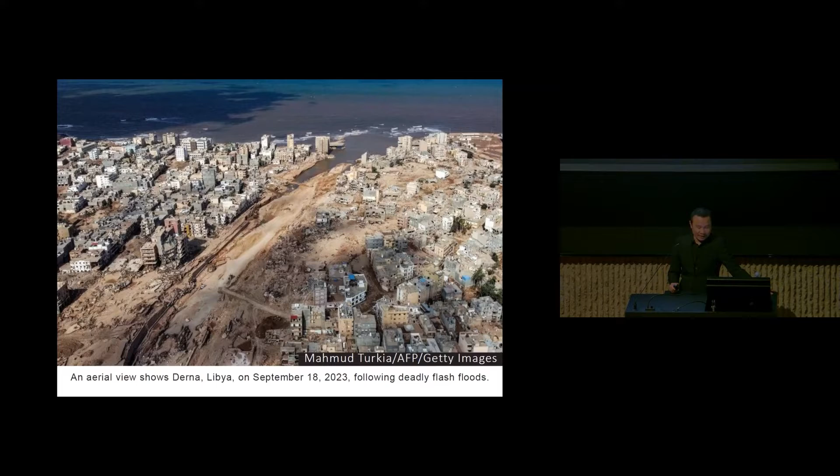But when I started to study architecture, I think I was familiar with the life without electricity, so I really want to do architecture that can have as low as possible energy consumption and electricity.

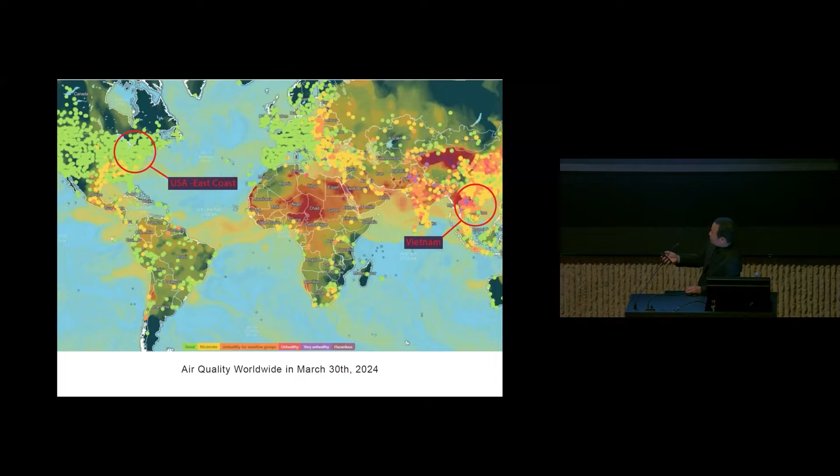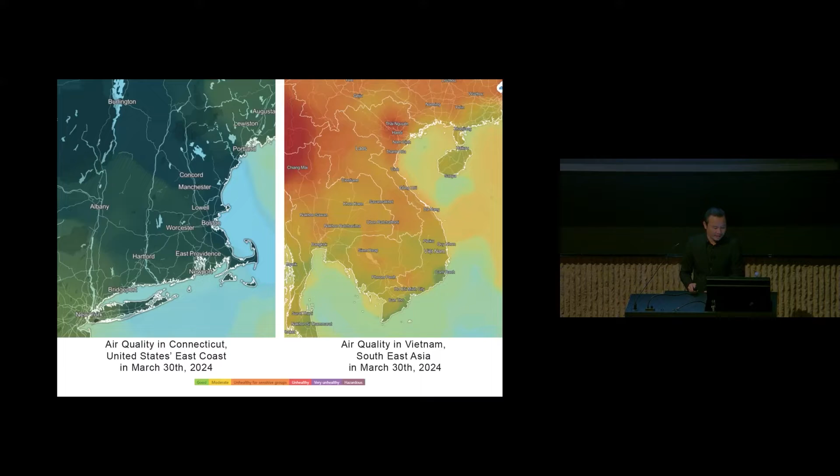And you can see here where we are, the air quality is really good with the USA East Coast, but the area of Vietnam is really polluted air, and Ho Chi Minh and Hanoi are both cities with strong pollution.

And the biggest problem is the city lacking greenery. Ho Chi Minh City has just about 0.7 square meters per person, while Hong Kong has even more, and Singapore, Kuala Lumpur, or Tokyo too. It makes the city look like a concrete jungle, with more than 10 million people living in this kind of city at the moment.

We lack greenery, we lack playgrounds, sport playgrounds. And after COVID, especially during and after COVID, a lot of people got depression and anxiety, because you can see if we live in this situation and we come back here, you live in a concrete box and go out and immediately hit heavy traffic jams. This situation plus COVID made people more nervous and more anxious and depressed.

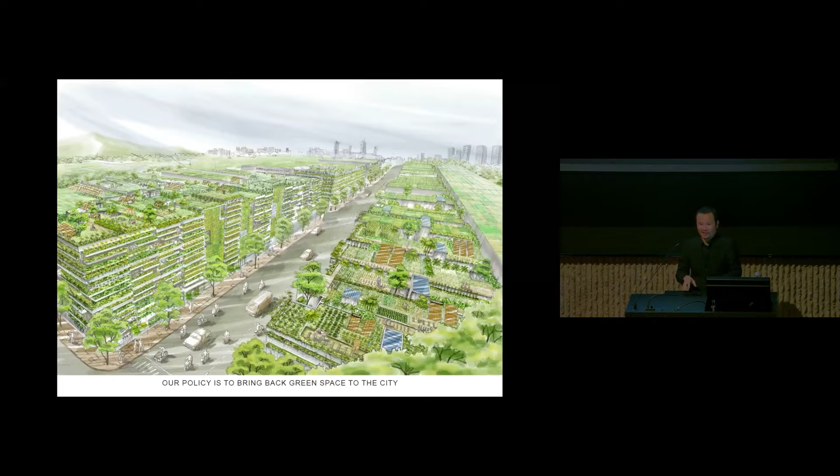So we try to do it one by one in the city, even very small houses, each one can be a pocket park, connecting people with nature. We contribute one small park for the city, connecting the dots.

After that, many other architects also joined that movement, and the city became greener and greener through architecture and master planning. So let me explain one by one.

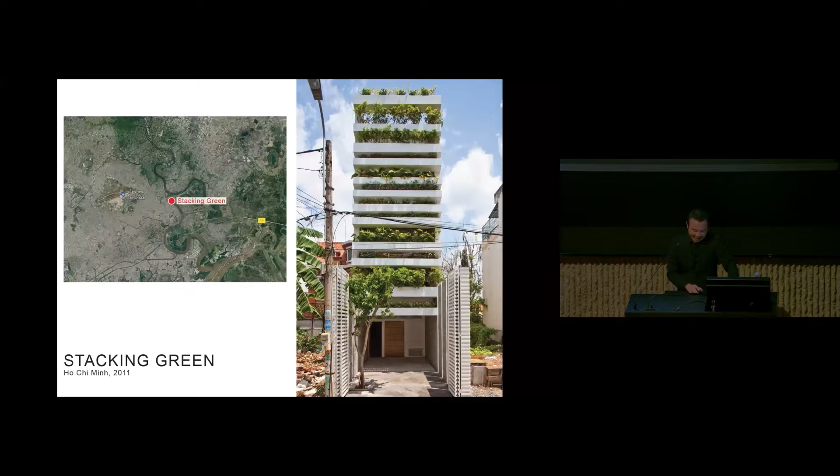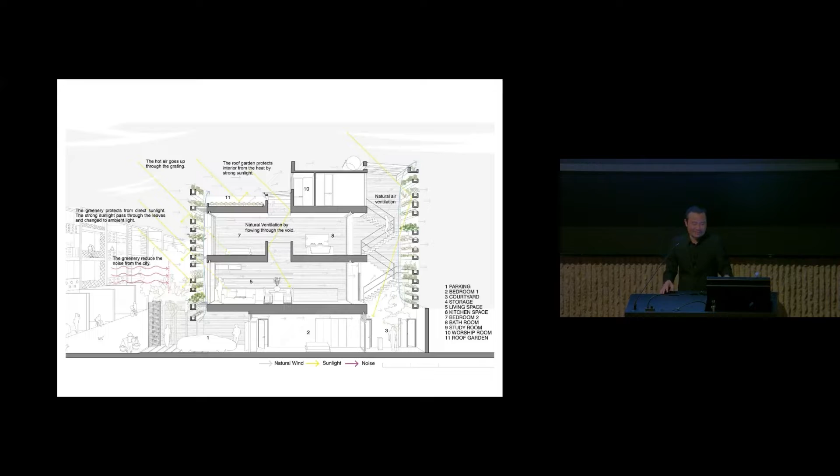In that situation, a very typical narrow house is just 4 meters wide and 20 meters deep. I designed this for a friend for free first, because I had just come back from Japan, and at that time it was very hard to convince other clients to do our kind of design work. So I thought we should start by doing a project for a friend for free, and then they would allow us to do whatever we wanted, within this 4 meters wide and 20 meters deep plot of land.

So we made a filter outside the house because it's quite polluted, and it also works to stop very strong sunlight, because in Ho Chi Minh City, like in Bangkok or Jakarta, we don't have winter, only hot summer all year round. So dealing with the wind, the sunlight, and greenery is really important.

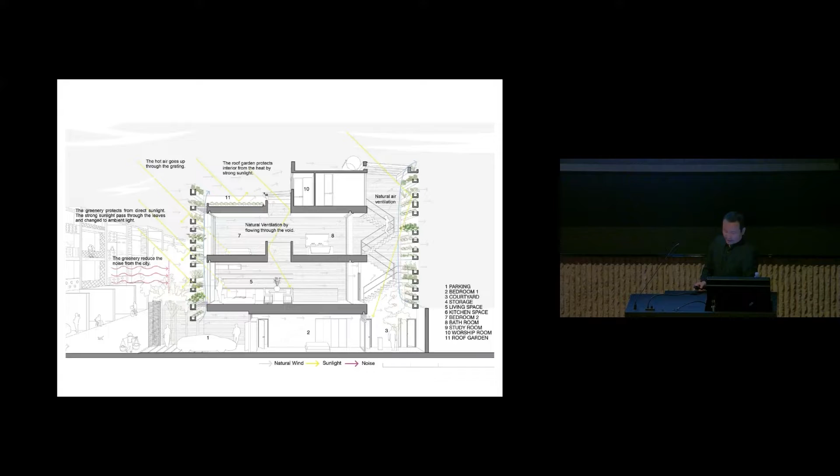So we make the filter outside the house to stop sunlight, but the wind can still go through in the middle of the greenery, and also we can create good shadow and ventilation for the house, because we have the courtyards here, and the ventilation goes through the void in the middle. Even though the house is very small and narrow, we still can create these courtyards.

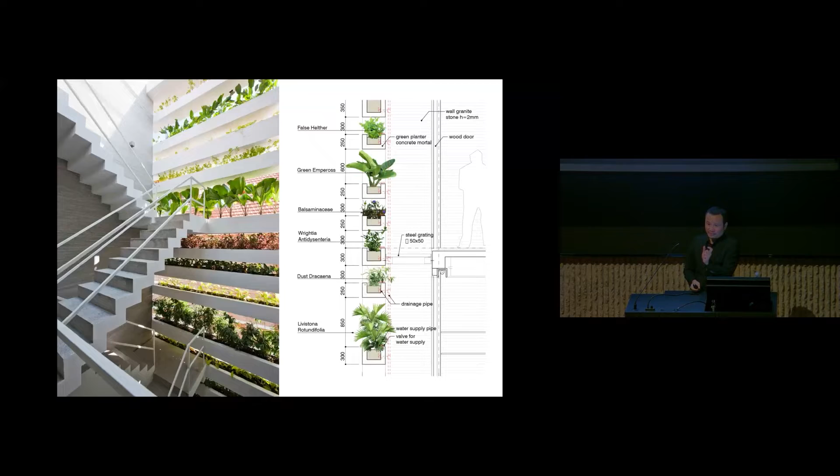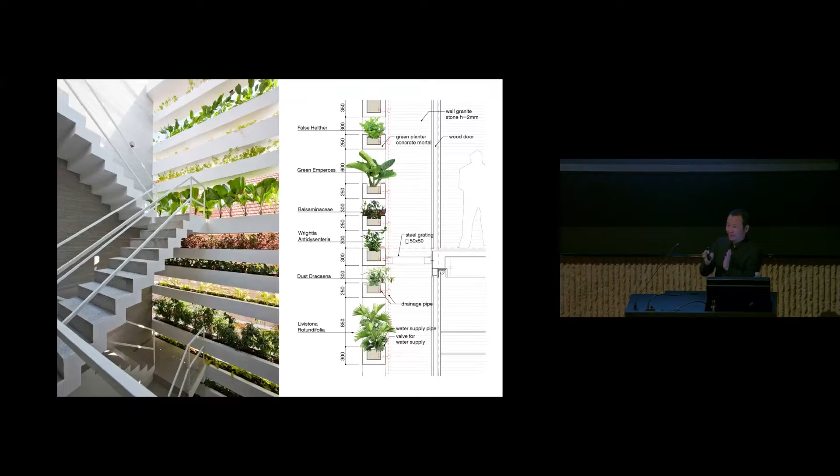And the courtyards at the end look like this. At that time, I was in Japan, trained there, and they do glass, air, and glass to make the double skin. But that is better for cold weather. For tropical climates, I thought we should do green, air, and glass instead — that's better for a tropical double skin.

So here is the back courtyard and the facade with a very simple system, and we still have the void in the living room for the hot air to go up from there. Even though the house is quite narrow — just double the width of a bed, actually less than double — we still have living spaces within the green space.

The next one is this school, where we won the competition. At the beginning, for the competition we submitted another proposal to win first, because people at that time thought building this would be difficult and expensive in Vietnam. After winning the competition, we showed this design to them, and that is what we wanted to build. They agreed, but said we should build it within about 2.5 million US dollars.

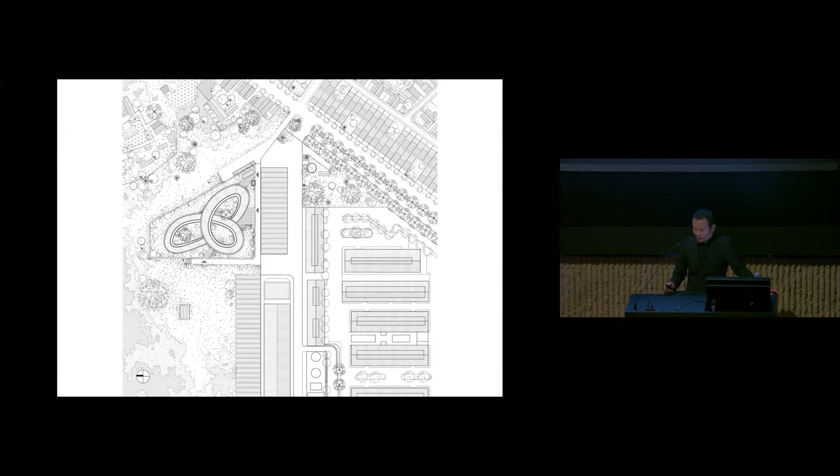This one is for a shoe factory, with about 23,000 workers working there, and their children learn in this school. You can see the situation of the city, which lacks greenery, so we wanted to provide a very safe roof for them to maximize their playground.

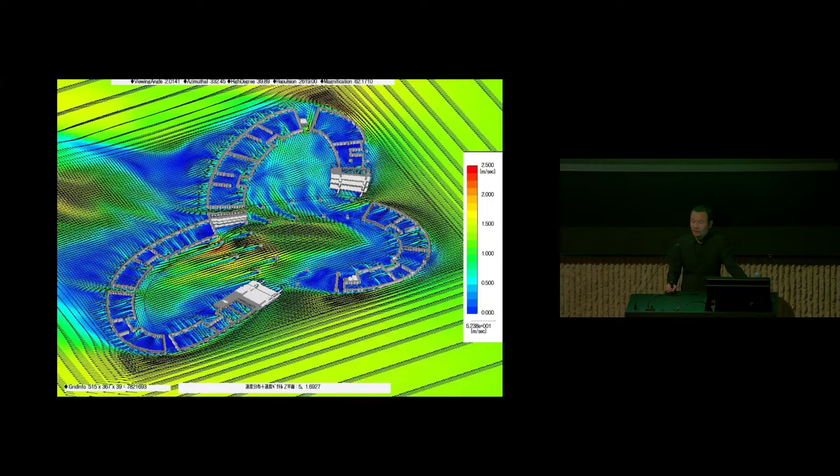Because the budget was limited, I tried to do simulations to be sure wind reaches everywhere in the space. Then we can save electricity, and we use green roofs and solar water heaters. At that moment, solar panels were still very expensive and not as popular as now.

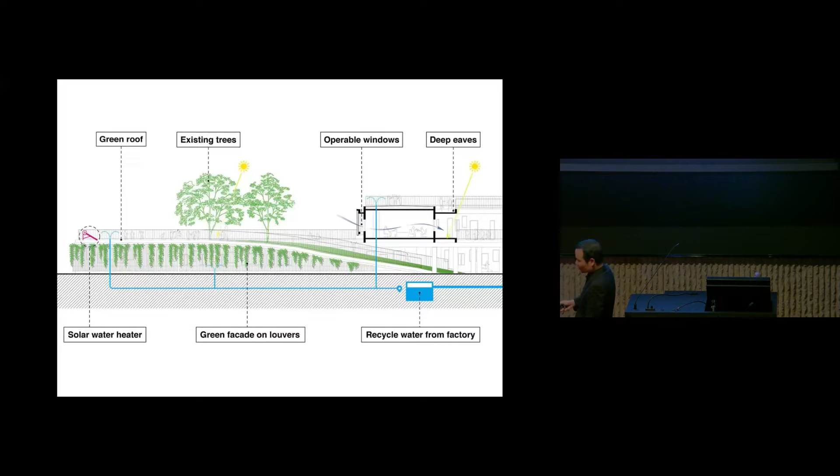And we use recycled water from the factory to water this farming. Because the workers are basically from rural areas and were farmers, we wanted to make a farming system on the roof for their children to learn about agriculture. It also shades the building underneath and saves on electricity cost.

Their parents can help make the farm here, and then the children themselves can learn from that activity how to grow different types of vegetables, and they can enjoy that activity.

You can see here the three closed-shaped courtyards connecting together, and connecting to the roof to protect the children from the dangerous traffic outside, continuing the playground up to the roof.

This house, from 2014, I designed for a depressed client. He was suffering from severe depression, and he didn't want to go out — he just stayed closed in one room. That's why we designed a house where even to go to the restroom, you need to go outside, forcing him to go out for some reason a few times per day.

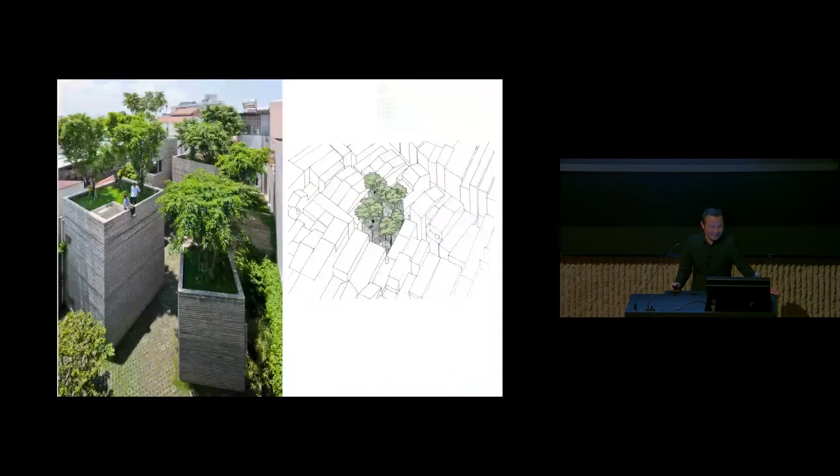The house is like a concrete box, with bamboo formwork concrete on the outside, so it looked like a box. But now the trees have covered it, and they live under a kind of forest. In fact, it's very open to the courtyard inside, and the tree system looks like this.

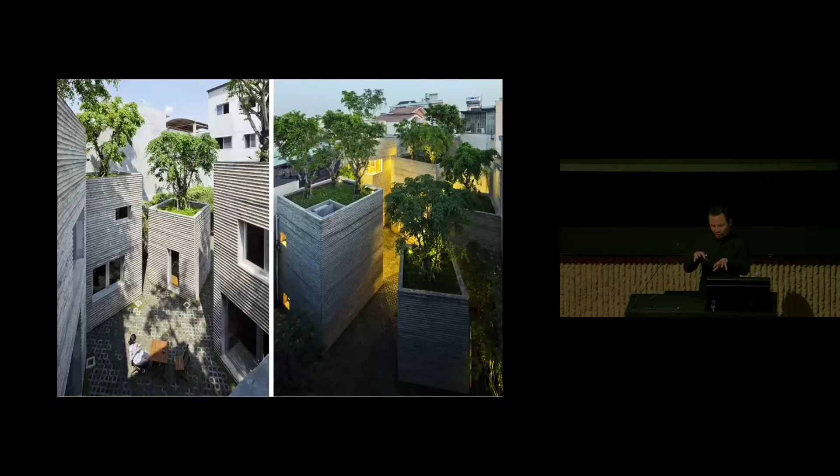Every room faces one of the many courtyards. We laid out the box in the middle of the land, with many big and small yards opening into the middle of the big courtyard.

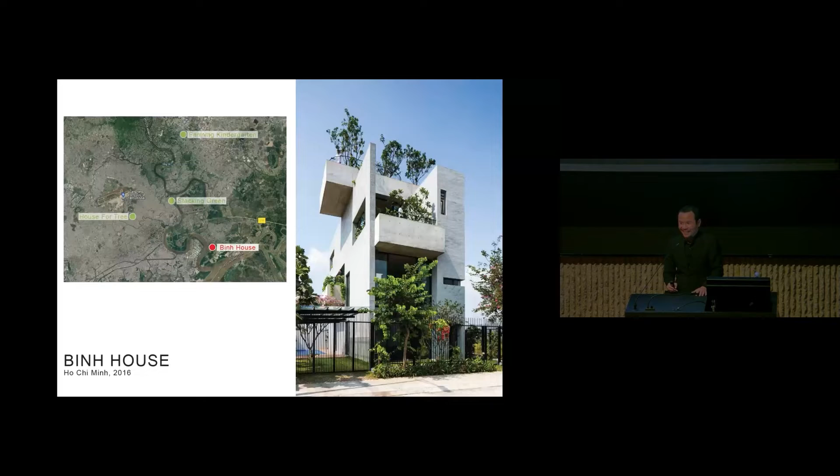And another point — we are increasing this little by little, but other architects also join in because they feel it works very well with Ho Chi Minh City, and gradually the city is becoming greener and greener.

This owner has two children, and they explained to me that the problem is the boys always want to play games in their room. So what should we do with the house?

I say we design the master plan here, master bedroom here, and then it connects. We can see everywhere, it's connecting visually, and also when you are in the master bedroom, you can see many levels of the garden.

The boy was addicted to games. Finally, he could enter Sydney University for computer science.

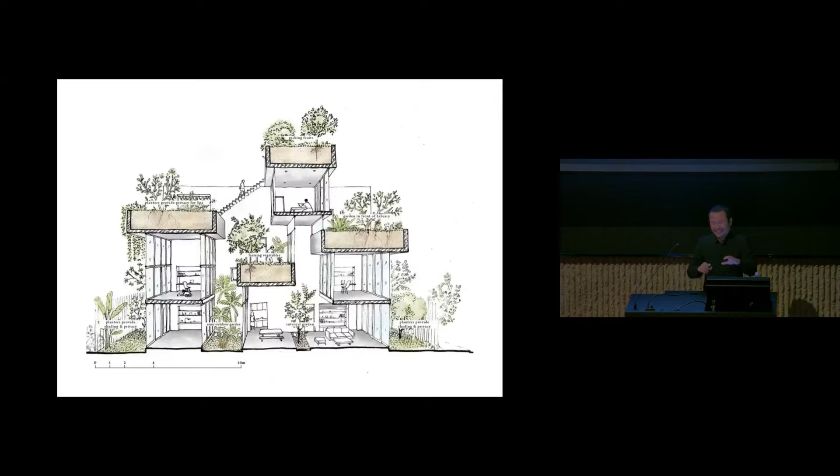But what I mean is architecture can help not only connect the many family members together, but they have their own privacy while being able to observe each other's activity. They close the curtain at this time, maybe he's playing a game, so for example they know that, and it connects together, and you can see many levels of the garden.

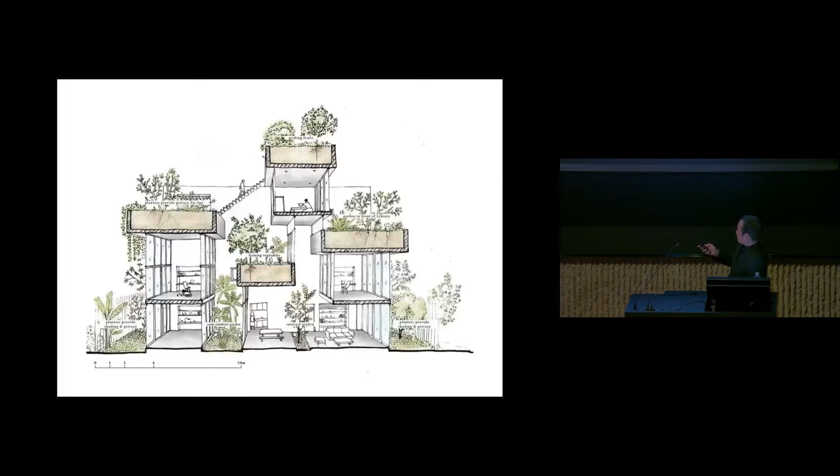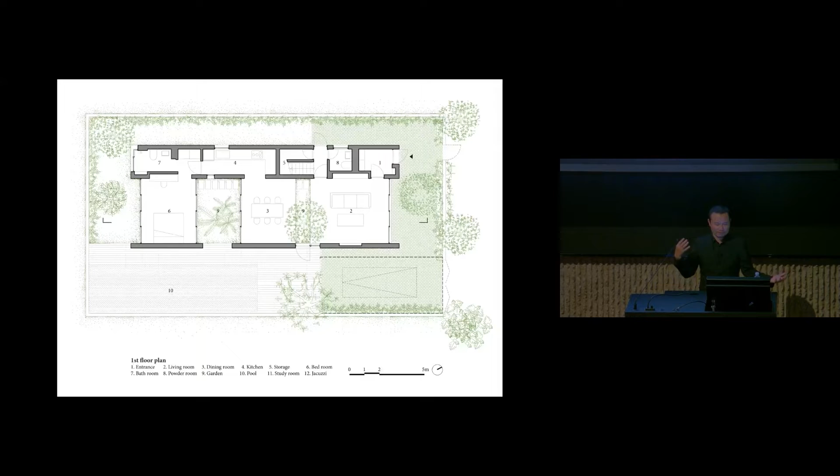The picture can't show it well, but you can see the section. If we are here, we can see through everywhere - this one, the courtyard here, the bedroom in front, you can see many levels up. From the master bedroom we can see the dining room or the corridor connecting those spaces together, and we made it the core - all open spaces like living room, bedroom, dining room are open to each other, and there is from outside.

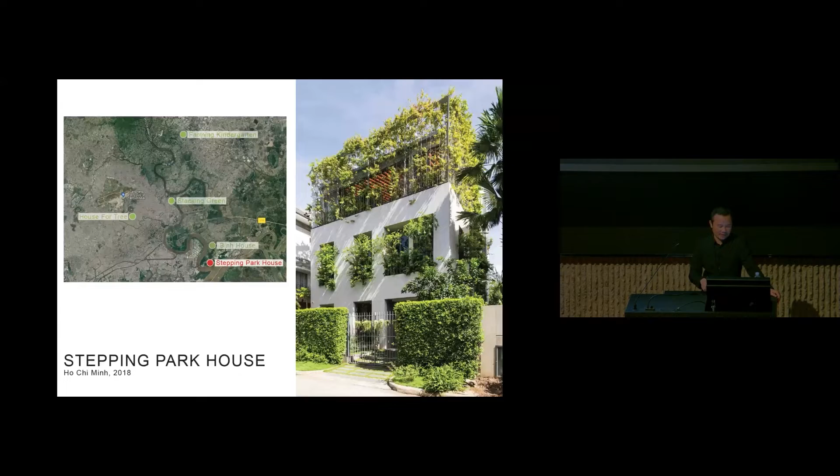Another goal is we try to increase the dots in the city. This house is a kind of easier house because it's next to a park, a small park there. So the way we do it is we try to connect the park to the house, to make the vertical park go up into the house. You can see the boy here, he goes to the park and goes up inside, and this also becomes one element of the park.

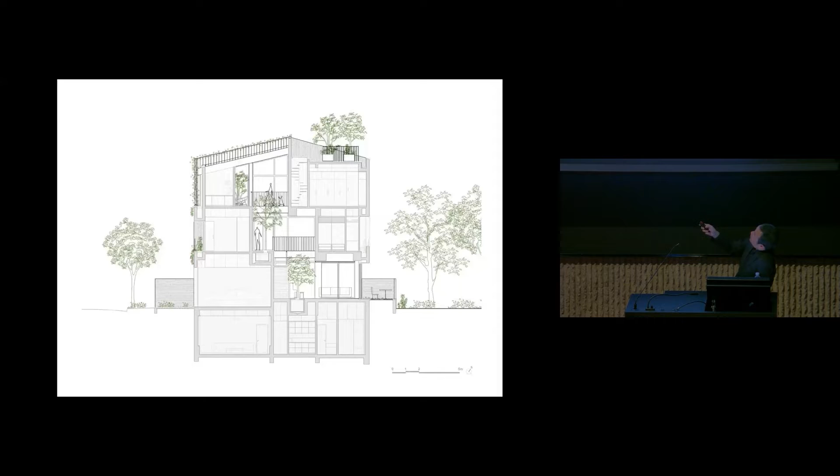So you can see here the back, the living room here, the big void connecting to the rooftop garden, and here is from the living room looking up. The living room connects to the garden to continue to the rooftop, and here is the rooftop garden of the house.

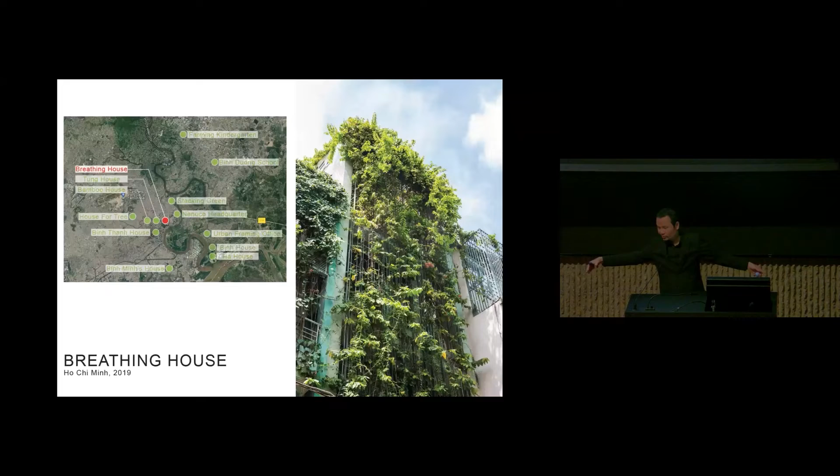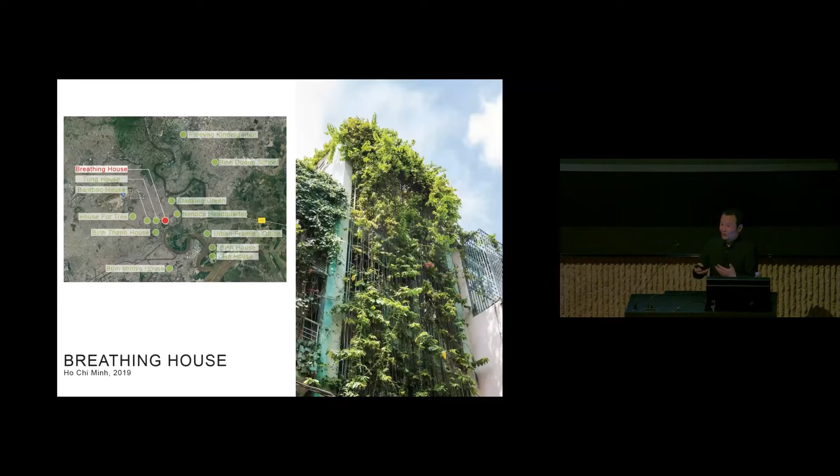Another very tiny house, just about 3 meters from here to here. It's a very tiny house, but we also wanted to add one more dot into the city, to make an example for people to make architecture, because in tropical climates we have plenty of sunlight, rain, and wind.

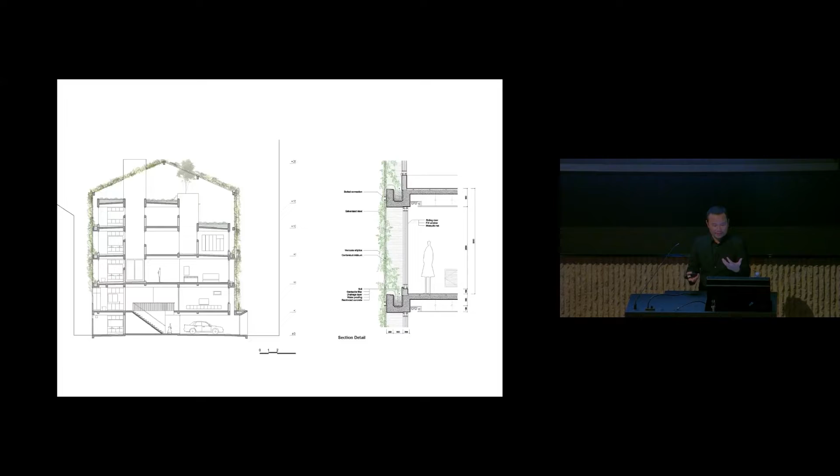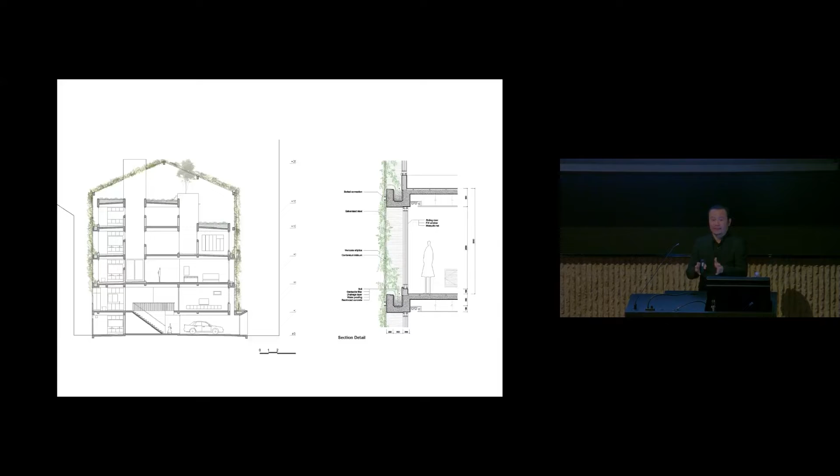Those things are free, so it's very easy to plant trees. We cover the house with growing trees, and many small courtyards - the hole in the middle of the house changes the air pressure, and it automatically creates the microclimate, because this house is in a very small alley. I think it doesn't have direct wind there, so we cover the house like this, and we plant it, and it grows up, and we can have a space like this - rooftop, like a big green box for the house. Here is from the back.

We can imagine the house is narrow like this. That is a difficult situation, but in terms somehow it will be our privilege, because it's easier to make architecture in Vietnam than in cold climates.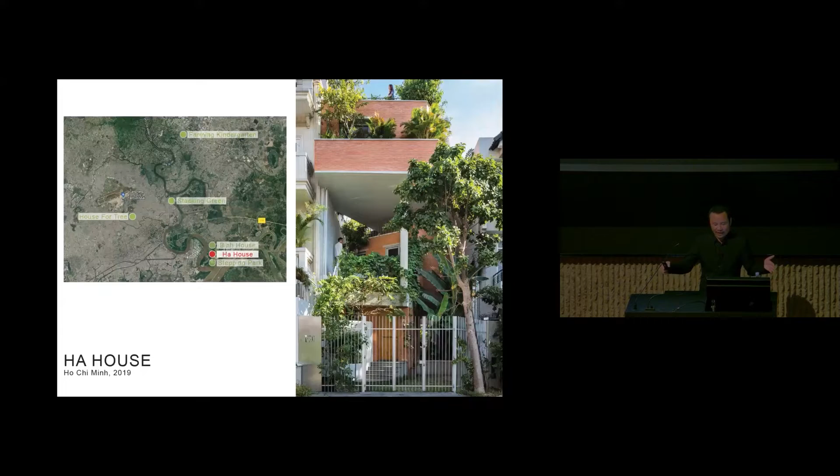This house also has a very narrow plot, and the owner has one boy, and then we made the house - we can't take a picture of this circulation, but it's like a stepping path going around, and the boy can play around with many fruits, many flowers. It changes the way of movement. But interestingly it turns, and underneath this we made a very long pool in the middle of the house, and it still works very, very well.

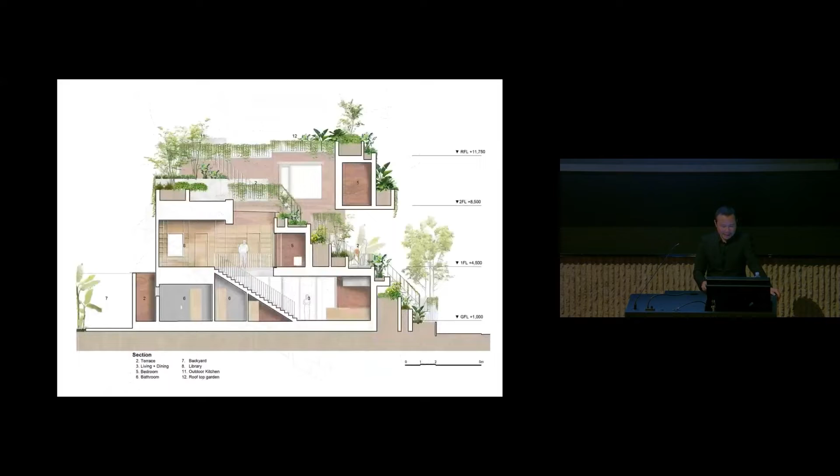The section from here looks simple, and the pot here is really big enough to plant a big tree, and the garden changes the view very, very fast.

You can see the space quality inside - we still create the void, and the top light in tropical climates should be a little bit smaller than here. Here is the second floor with the learning space and bathroom. Here is the master bedroom - even though the land is small, we made a cut, and that's why we still have a really big open view to the courtyard, the small garden there. And here is the learning space.

And this is my office in Ho Chi Minh City. So we wanted to add one more dot here, but we are architects, so we don't have much money. So we made it simple.

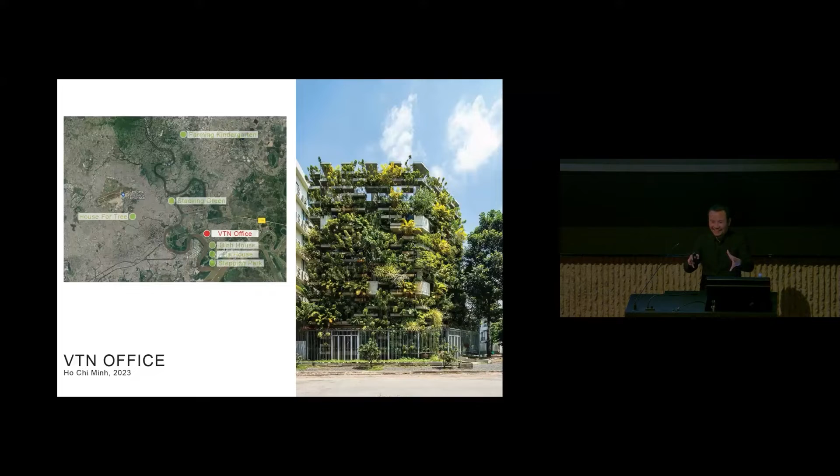Make it simple is really important. So we just make the concrete frame, concrete frame, and hang the trees outside to make it easier for water leaking and those issues.

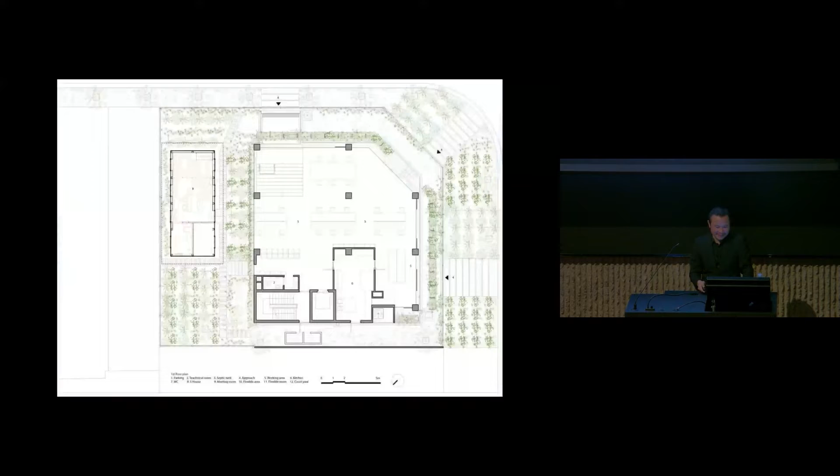That is really important, because even the curtain wall, we hide it, we make it with concrete at the beginning. Otherwise, once you finish the concrete work and add more, that curtain system costs you a lot. So we make it one time, using reasonable labor cost.

The aluminum, the low cost aluminum, is hidden behind the concrete, and it helps us realize a reasonable cost for the architecture, but it's still acceptable.

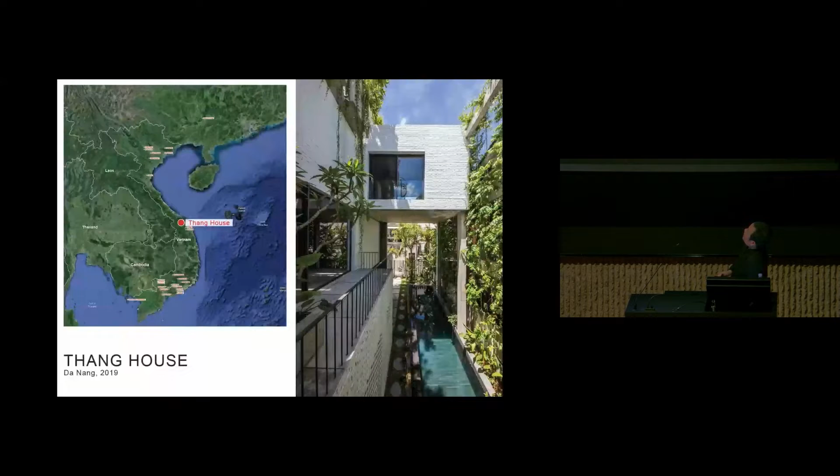And we expanded our activity to other cities too. This is another house, designed with someone who was previously my staff engineer. I believe he can make the building detailed, so we tried working with each other.

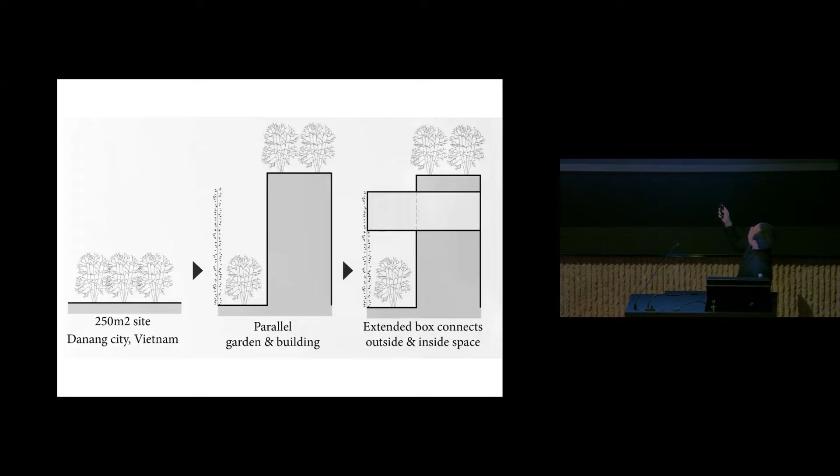We designed this box, and put a tree through that box, making a big tree fence here, and on the rooftop there's a very big pot, about 1.2 meters high, to make a really big kind of garden—not a garden, more like a forest, a small park there.

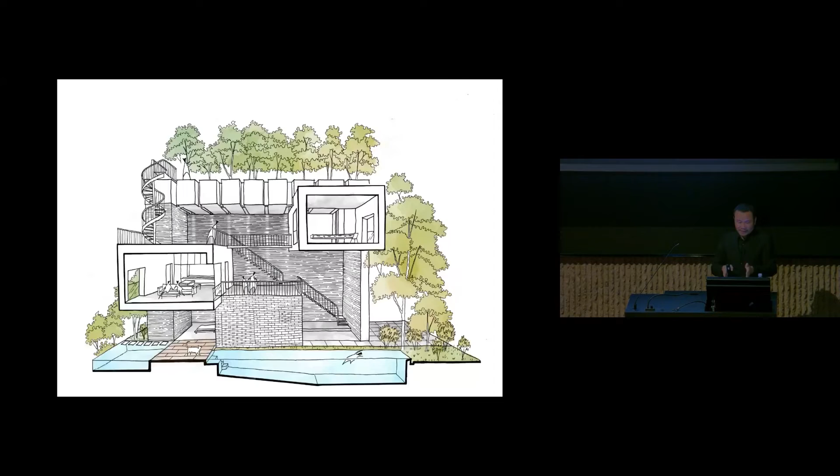We introduce natural light through the house, with the big tree connecting the boxes together. At midday the light is very soft, because the pot is deep enough and the shadow from the tree softens the top light too.

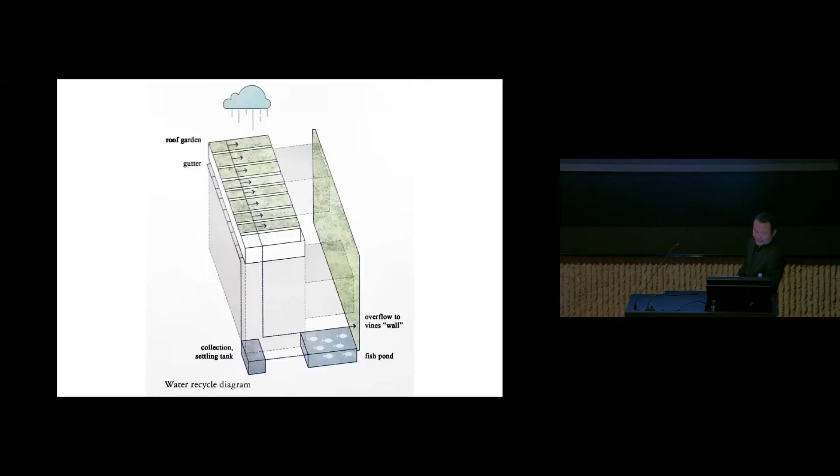Here we have a green fence facing the not-very-beautiful neighbor, with climbing trees growing up it. As you can see here, the green fence here.

The pool acts as a cooling system, playing a role as one part of the cooling system for the tropical house. You can see the connection from the ground floor to the second and third floor, with light coming in at the end, and the ventilation is quite good—we don't need to use much air conditioning.

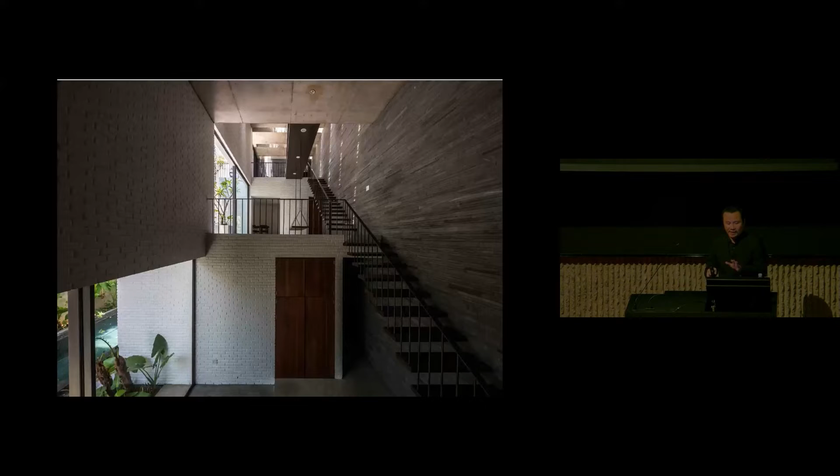In all of our projects we prioritize good ventilation, using sunlight for lighting, water and wind, and greenery and shadow for the tropical climate, to reduce electricity use.

We install solar panels on top of this, and you can see the connection in and out, and the way we make shadow, ventilation, and use material. This staff member is very good at detail work, so we tried to develop it together.

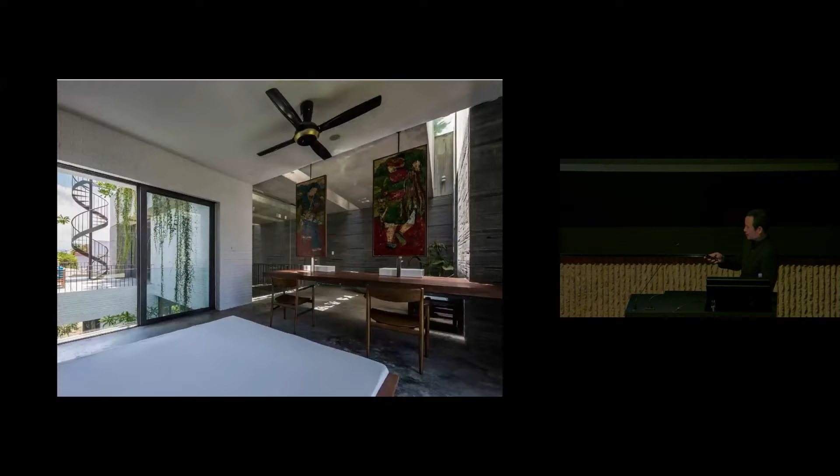The sunlight goes through here, the master bedroom. When lying down, we can see the very big tree in the pot there.

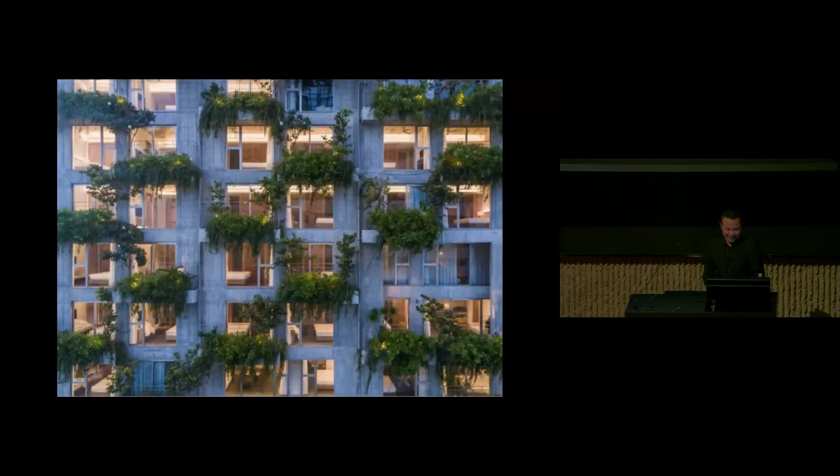In the same city, we were asked to design a hotel on a very small piece of land, about 700 square meters—around 7,000 square feet. We achieved 153 rooms for the hotel, which is a lot. You can see the facade here.

The way we tried to make it—we didn't have room to play with the space, like for the reception, we didn't have space for a void or high ceiling. So here's the entrance, with the entrance behind this box.

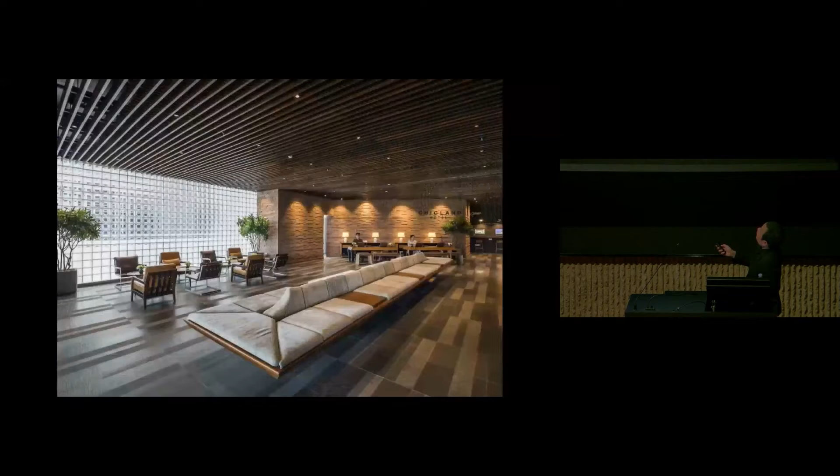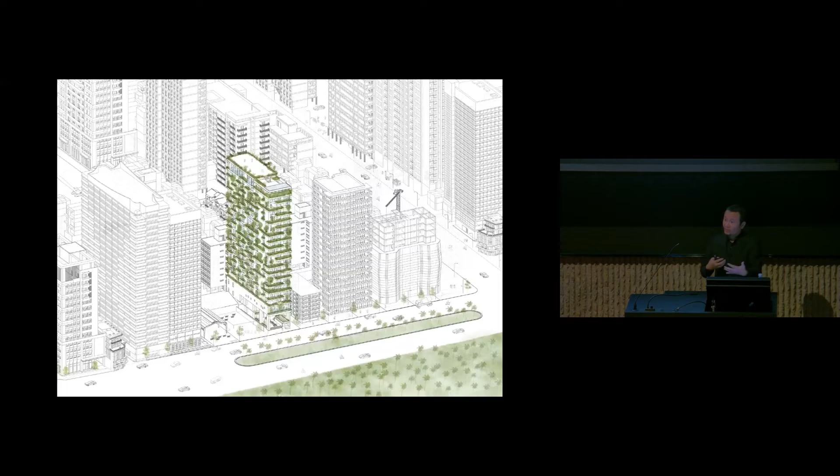Behind this box is the car parking going to the underground. So we designed this box like a green tree, near the entrance to the hotel, and here is the reception. You can see in the middle of the concrete jungle, it became meaningful.

Another dot, this is for a very big IT company office. They do some brainstorming meetings, so we decided to make huge greenery around for them and make yards for them. In the middle of those spaces, we have courtyards for them to walk around, to meditate, to do the brainstorming for their future plan.

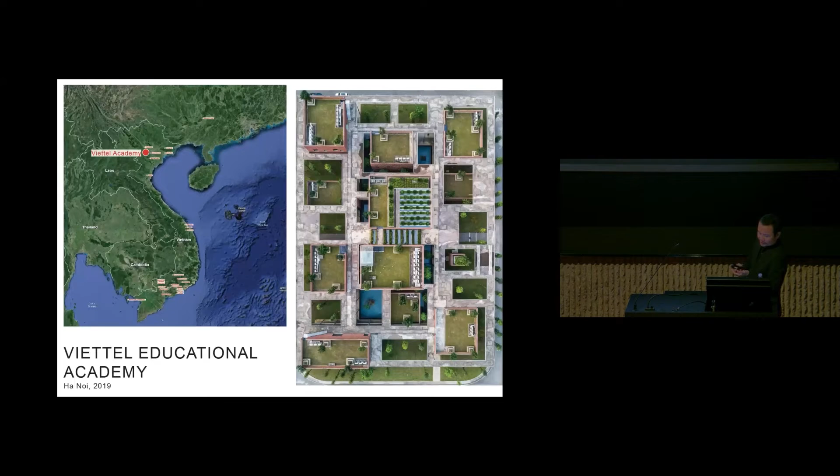The ventilation and those courtyards connect to the rooftop yard, and the space inside connects to the yard in front. Next to them we designed an academy for the IT group too. The same idea, we try to make these trees grow up to the 8th floor high of the building.

I mean this tree, even though the land was small, we plant very big trees, and it will grow up. We put the boxes in the middle of the trees and connect them together by the slab and bridge in the middle. It is very hot in this area, so we put the box in the middle under the trees, connecting them together, and make a pond in the middle of the project to make the climate better.

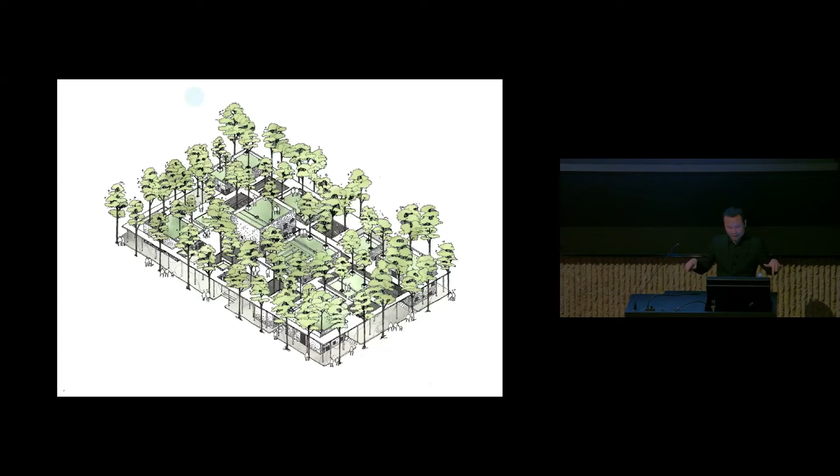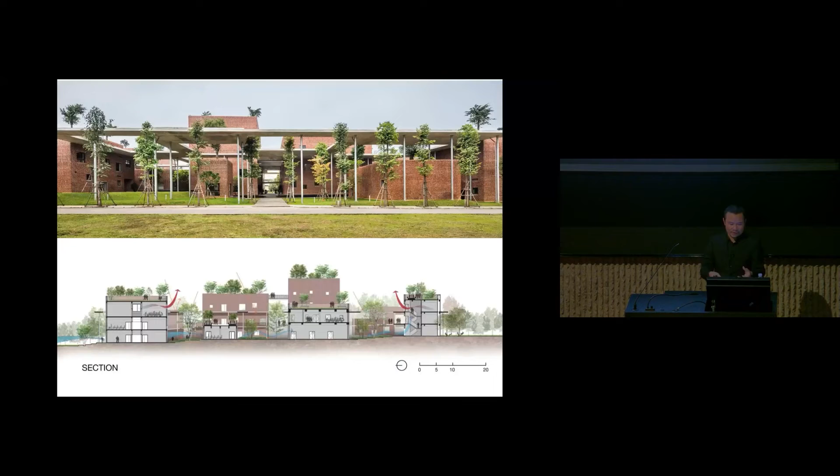Here is the design. You can see the tree grow up and make the cover, with the box in the middle of the tree.

We also use the privilege of low cost manpower to make shadow on the wall too. The tree makes shadow, but the wall itself will be very hot in the summer, so we make shadow on that. The double wall is outside, and it makes shadow on itself, making the building cooler. Then we make the pond in the middle of the project, as you can see here.

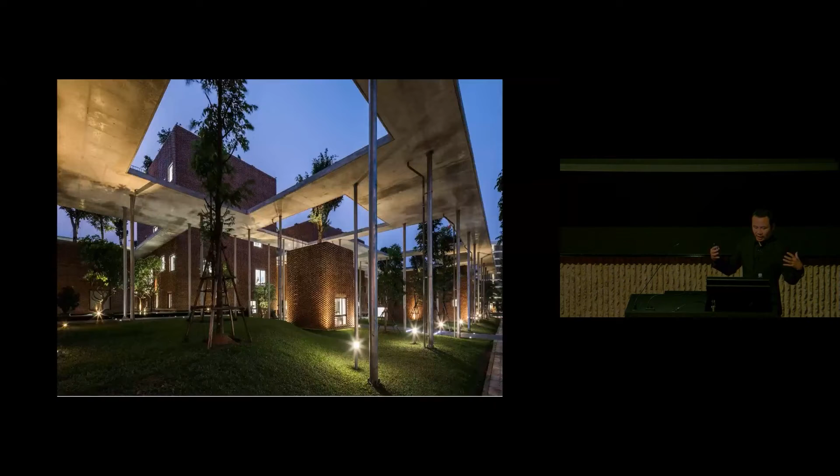Here is the welcoming entrance, and the tree grows and makes the box under that tree. And another house.

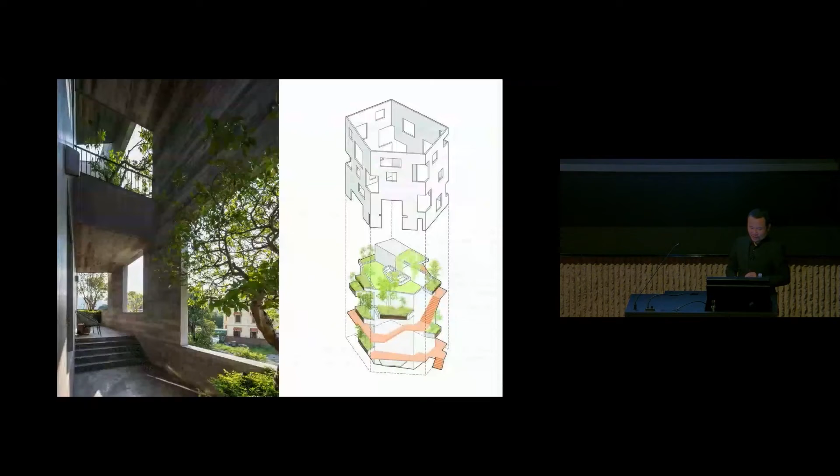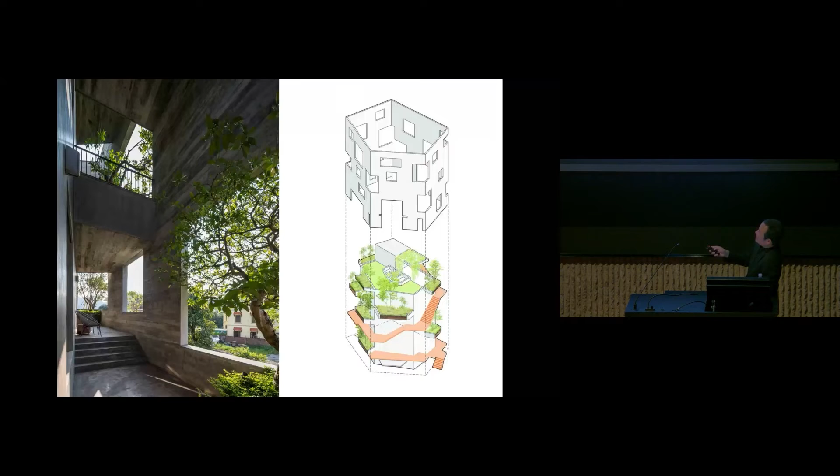Here the land is about 5,000 square feet, a little bit big already for the Vietnam situation. We decided to make even the fence as greenery, making a filter outside and a staircase around to make a double skin. We plant the tree in the middle of two layouts like this, framing the landscape around, and making it cooler during the very hot summer.

So it can contribute to the city with this double skin: the concrete wall, greenery and air, and the inside space like this.

Another house, the owner is in the pottery business. He is doing pottery business, so we ordered from him - you can see the landscape around - we ordered him to make special pottery bricks for us to make the filter landscape around.

Because the land is not really big, we make the wall filter the landscape around, and install greenery in the middle of two layouts to filter out what we don't want to see much. Then we can have internal landscape, and the light - really strong light through that red brick - makes a really special light quality for the house, soft but nice.

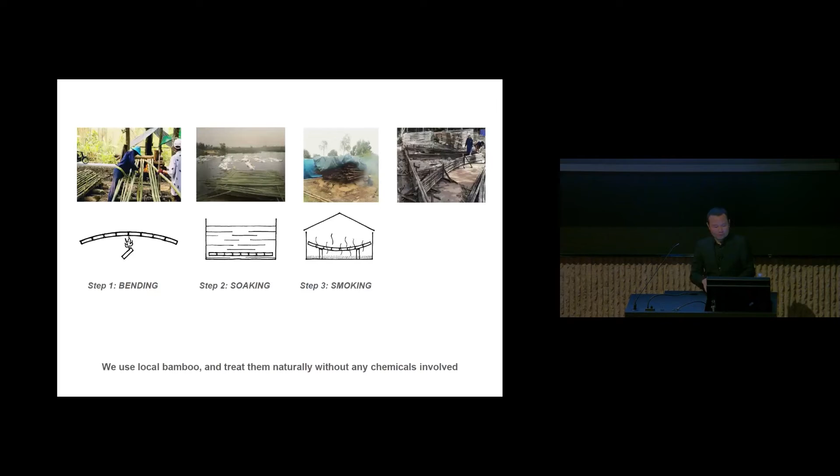This one is from when I came back from Japan. It's my second bamboo project, the first pure bamboo structure, because at that time I didn't have much, didn't have clients, so I decided to do it by myself.

I hired some workers to do it with them together, because one piece of bamboo is just $1. So if we use 3,000 pieces, it's just $3,000 - with $3,000 we can make something.

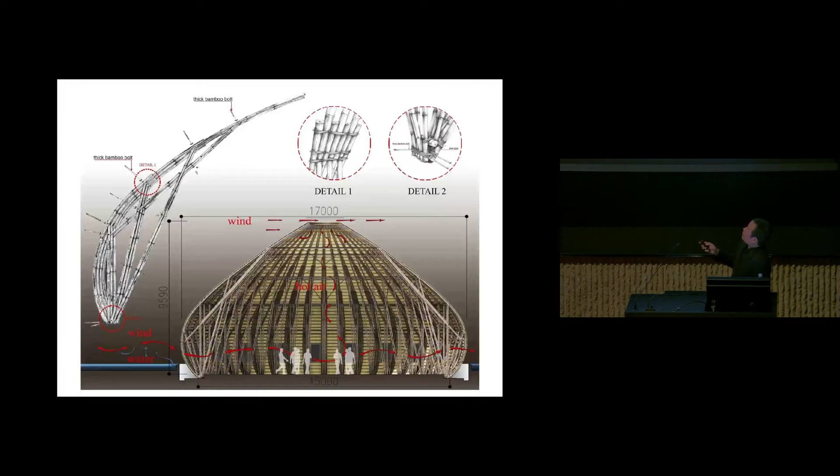For testing for myself, we built the pond around in the middle, and to reduce the cost, I decided to make it simple: one system of bamboo, one unit, repeated again to make one circle, then we have the dome. The rest of the bamboo pieces, the small ones, we use to make the light fixtures and furniture - big parts for the building, small parts for the furniture.

So everything here is very low cost, but it makes a warm atmosphere and very good insulation for the hot summer. The water around makes it really cool, and the low window lets the wind come through.

Next challenge is we try to make the bigger system with the artificial pond around, and this structure is quite unique. It's a 12-meter cantilever by pure bamboo structure, and we use tension on top of that to put it together and make it natural.

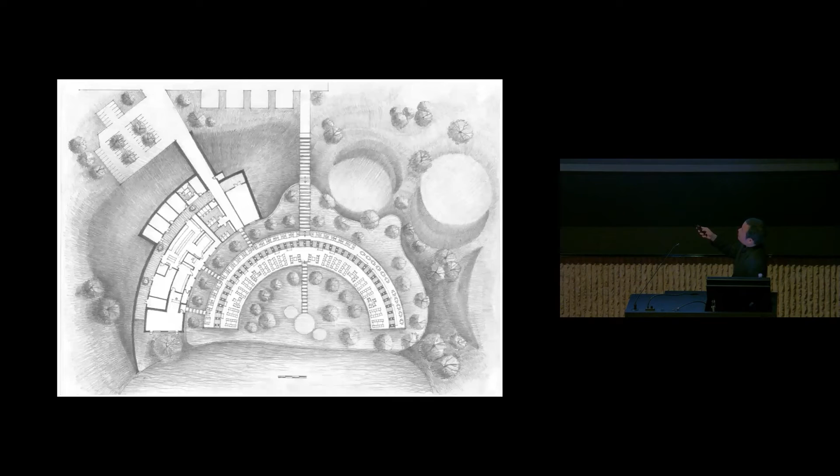Air conditioning by the wing like this, and we make the hook at the top of this by the wire. The plant is next to the natural pond, so we make the artificial pond next to them. This is open space, and every function, restroom, everything is under the hill, and the wing is like this way.

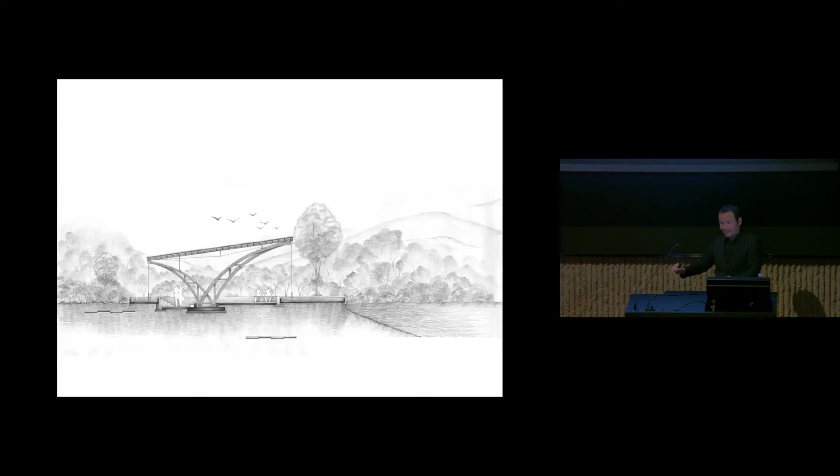From here to here is 12 meters, and we make the head for the bamboo here, and we make the tension here and put it up. Of course here it's heavy, so we have tension here, and tension here to make it stable. It's still shaking this way, so we make tension the other way - you can see the structure here and the tension here.

This was done in 2008. For the shaking, we do the tension not straight down but a little bit A-shaped for keeping it stable.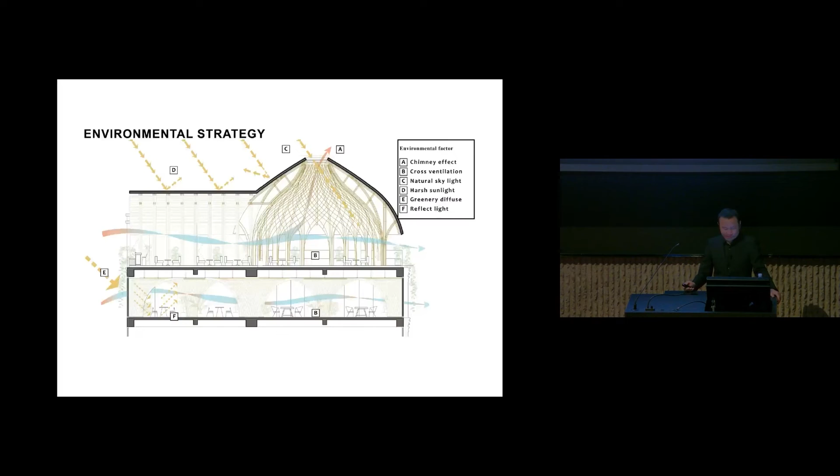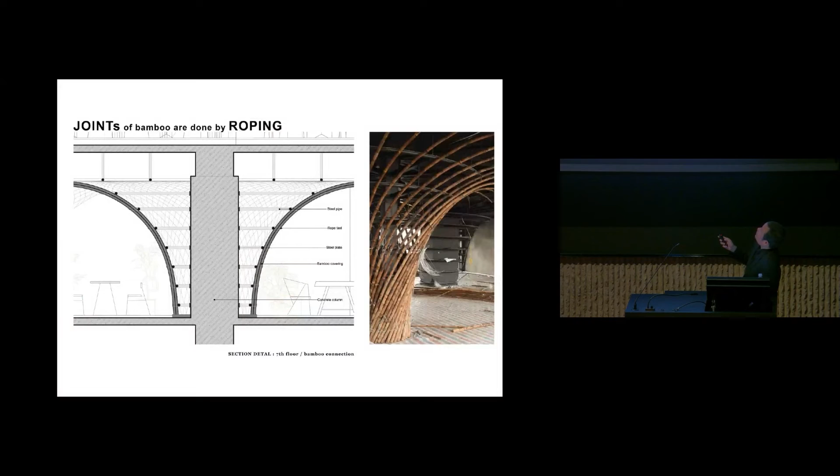Another is the renovation, my partner's project. When I was in Myanmar, we discussed it a bit, and he tried to make the concrete building interior become like handcraft in Vietnam. The workers do quite well to create a space with a very low slab, but we still can create the bamboo interior, and we do the pavilion on the rooftop of that building.

Like this, and here is the top of that pavilion.

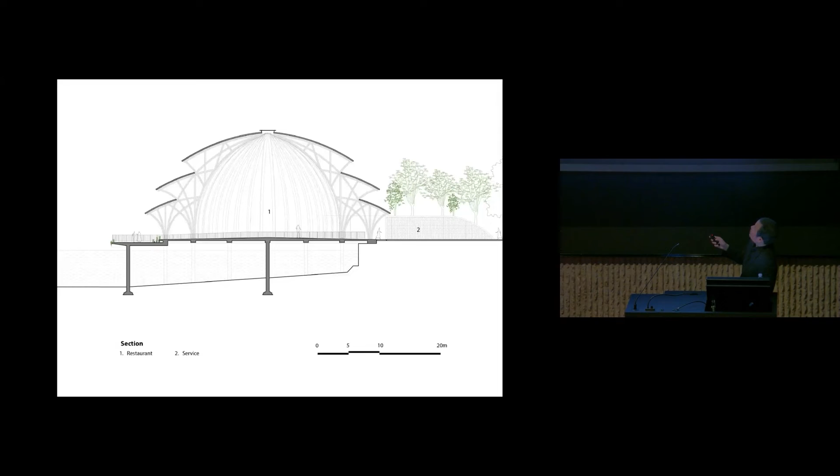Another one is a resort in northern Vietnam, and we were asked to design the middle of the community center. It combined with a restaurant, and it sits on an artificial very deep lake. This is about more than 1,000 square meters, and it's about 36 meters with pure bamboo structure. It's very huge - this high, it can contain a 5-story building inside that, with a very big bamboo dome.

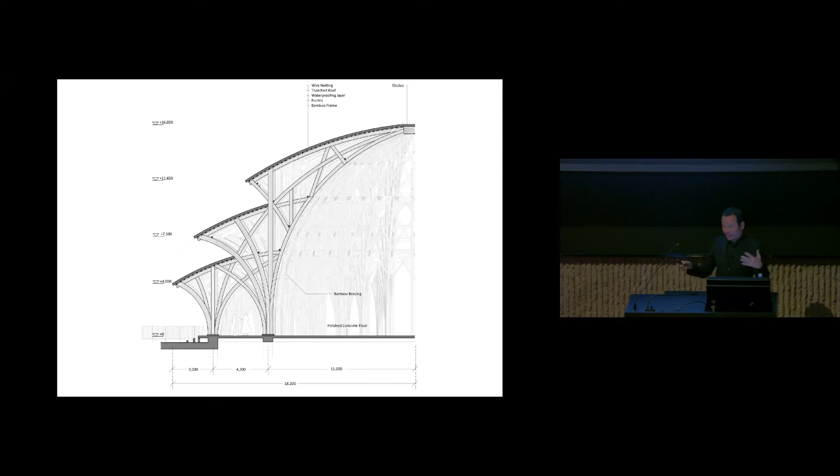We create it into units, and we repeat the units together and make the braces like a decoration, but the braces are there to make it solid together. We have many braces between each element, and then there's a buffer zone between outside and inside.

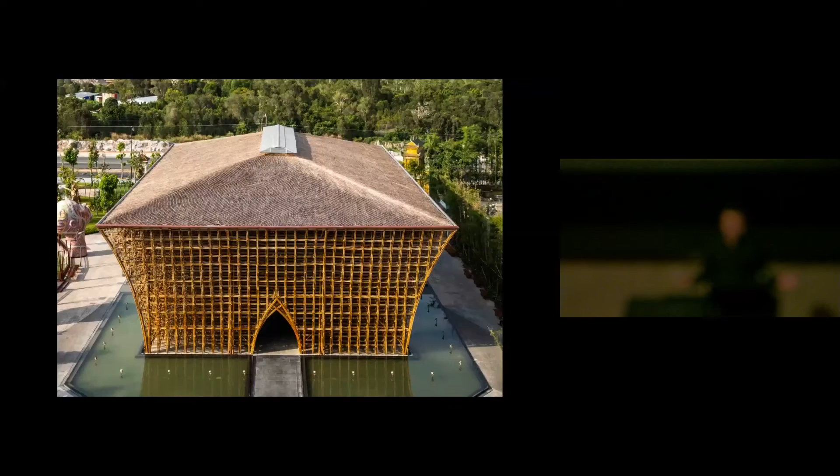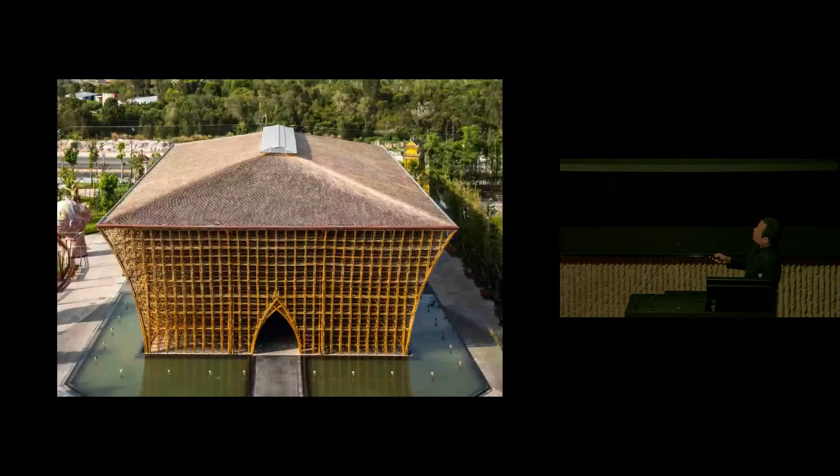Another project, we were asked to design a welcome center for a very big real estate project. We designed it with a grid system outside and 2 domes inside for their activity, with no air conditioning here - this one too, no air conditioning, and this one also open space. The grid system and the dome system contain it, and we can enter and go outside toward the artificial lake.

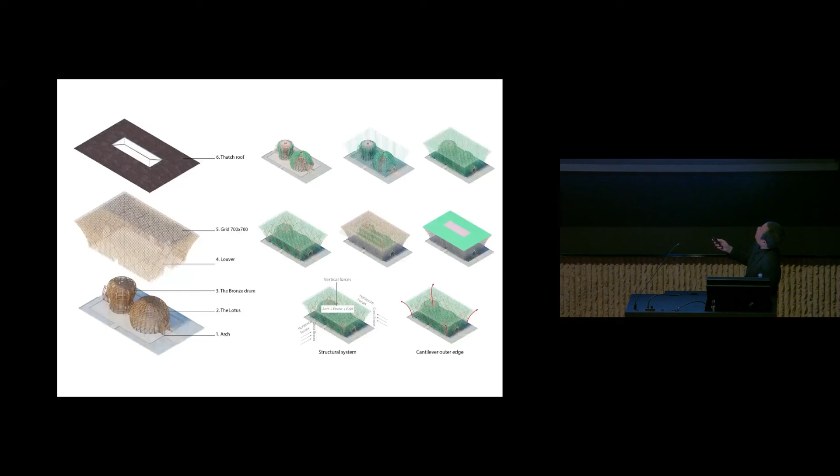The structure system here has the core made by these 2 domes, and the grid system outside with the braces. We hang it up because here there's a very big cantilever too, and this detail is for the entrance.

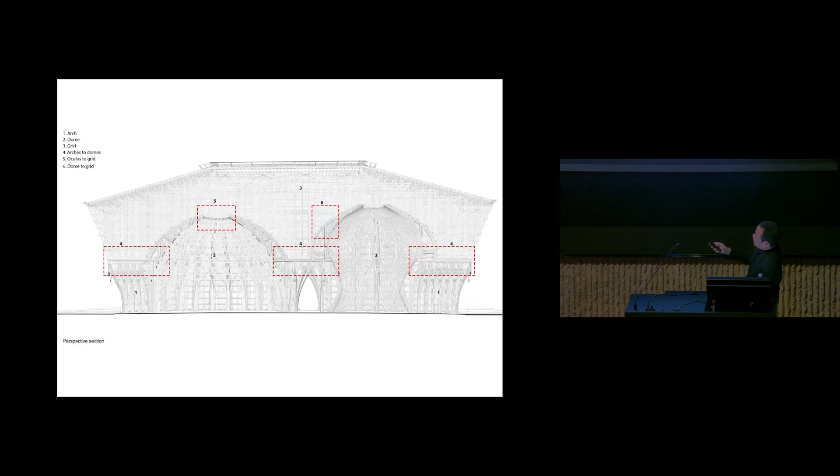The detail of the entrance meeting this dome is very hard for the workers to construct, because of the system of stress, the arch, and the circle inside that it creates.

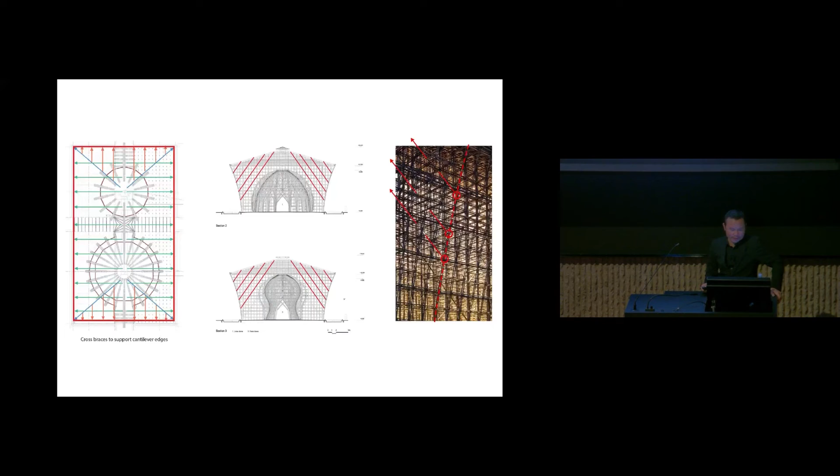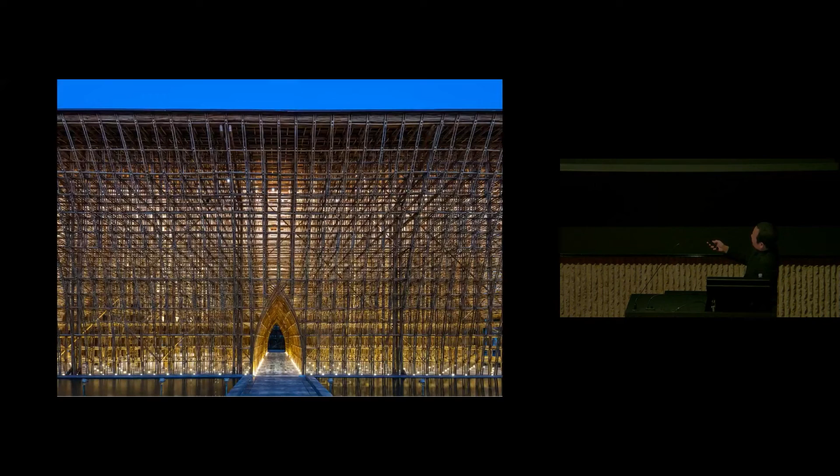The most difficult part is where this system meets the circle there, and we try to make a ring on that circle, and all of the grid starts there and stops there.

It looks okay, and it's very soft light from outside, and the wind goes through. The natural light on the rooftop makes the building feel calm, quiet, peaceful.

And then another dome is like the drum in Vietnamese culture, a traditional one, and here's the whole system.

Another one is the community center, and we designed it - we don't have earthquakes, but there are really big storms in this area. So we designed the unit system and braces with those elements to support it. You can see the unit here - it looks like decoration, but in reality it's a brace to support the structure against strong wind from huge storms.

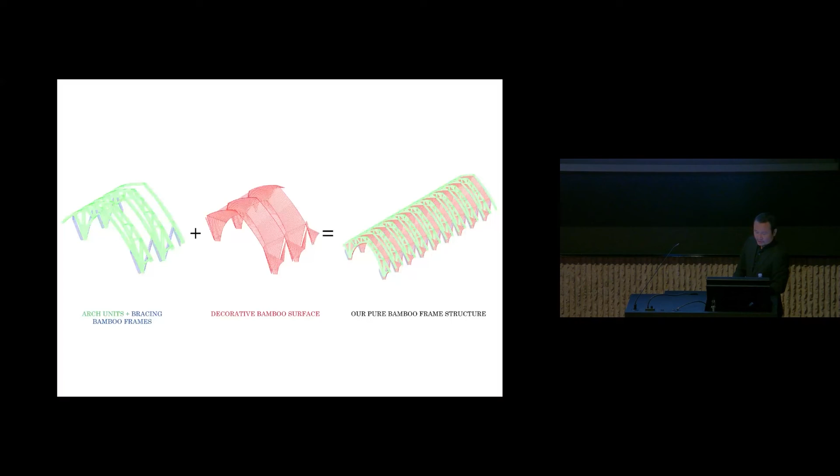It's a very big storm. Once a client said a few years ago that a historical storm was coming, and we couldn't do anything - we had to wait to see if it would go to Laos or not, because it was too strong.

After the storm was gone, I called to ask him how his project was. He said nothing happened, it just got wet - I mean the roof got wet.

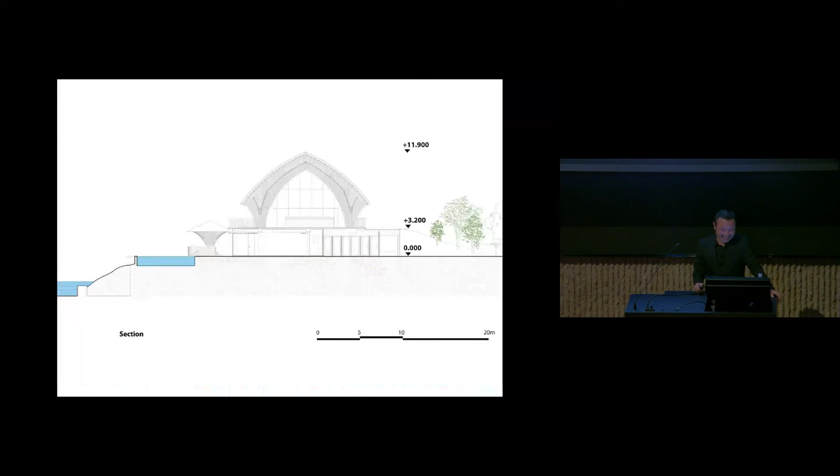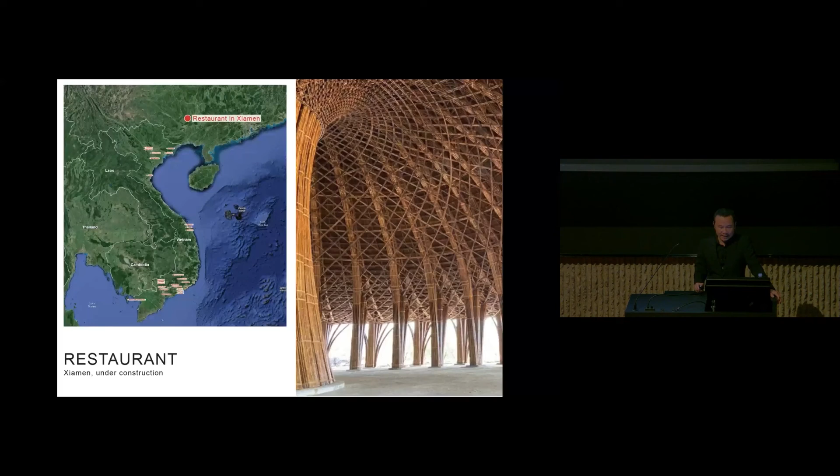So it's another project in China, in Xiamen, and it's also in a storm area, a very big storm passing all the way through here, Taiwan, to Japan. The structure is also the same. Thank you very much for listening. Thank you.